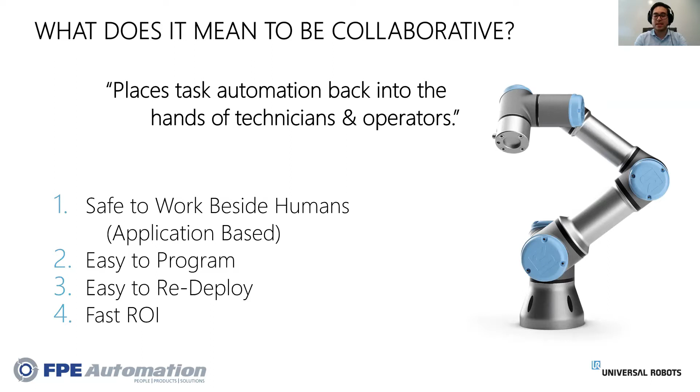Number 3, cobots are redeployable. Because they are safe and easy to program, the time it takes to reset for a different application is very manageable. And finally, number 4, a fast ROI. By the end of this presentation, it will be clear why cobots have the fastest payback at this scale of automation. In my section, I'll go over the advantages cobots have in keeping the overall costs down.

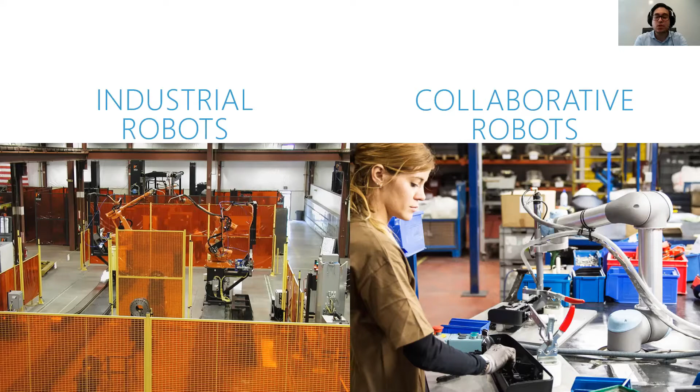So this is huge, and there's no people working in the cell at all. On the right, you see what cobots are achieving today: smaller footprint, which means higher efficiency, and using the cobot as a tool to take the repetitive tasks out of the manual process.

From a business standpoint, we have to look at costs, and that's where the difference can be less obvious. The initial cost of the industrial robot is similar to the cost of a cobot. The difference is what's below the surface. For an industrial robot, we have end-of-arm tooling, 3-phase power infrastructure, fencing and guarding, light curtains, safety scanners, software license, integration and programming, maintenance and repairs - the list can go on.

Now for the cobot, we have end-of-arm tooling and teaching, and that's the goal, to get rid of all that unnecessary stuff. So beyond keeping the costs down, there are many related challenges that a cobot can solve. In a tough labor market like in the US, manufacturers can struggle to find engineers with automation skills and experience, and that can add even more to the implementation challenge and cost of the industrial robot.

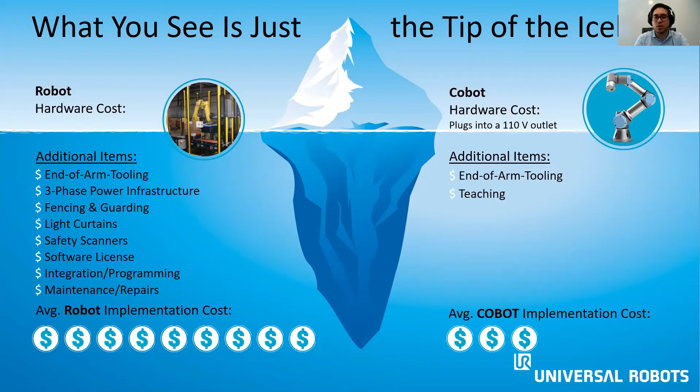So I want to go over some of the challenges to automating. Let's take a closer look here. In the world of manufacturing, everyone is facing increased competition and the need to improve margins. We know that. For smaller manufacturers, you may not have many processes automated, so you have high mix, low volume production. That might not be as cost effective for traditional automation, especially if you're not a robotics programmer.

You might have limited space as well, so the need to keep a small footprint is somewhat mandatory. For larger manufacturers, even if you're highly automated, you're still stuck with many repetitive manual processes where a large industrial cell just doesn't make sense. And that can lead to high employee turnover as well as quality and consistency issues to just keep those manual. Now, of course, at any size, you need to maintain a safe working environment for your employees. You might have workers' comp claims due to poor ergonomics.

And finally, we all know you need to do whatever you can to hire and retain employees while still staying competitive, and that's another place that universal robots can help. So with that in mind, I want to move into your business challenges. According to a 2018 survey of a diverse group of manufacturers, these are the main challenges facing companies today.

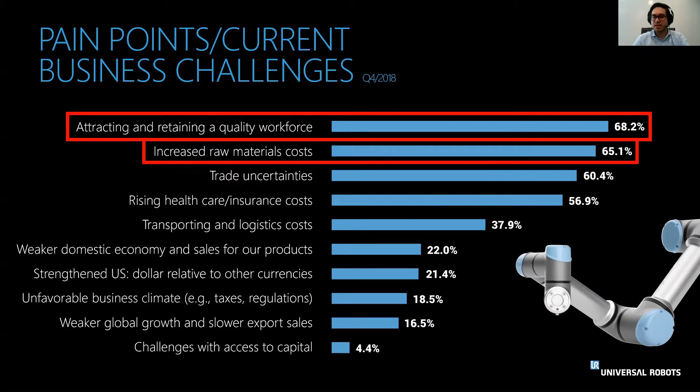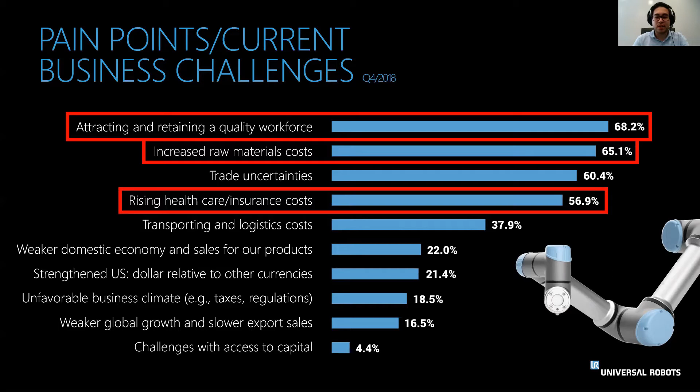When it comes to attracting and retaining a quality workforce, what if you could automate the dangerous tasks and improve your workers' lives? When raw material costs are ever increasing, what if you could immediately improve quality and reduce scrap? And with constant rising healthcare and insurance costs, what if you could lower your total labor cost or increase production without increasing labor? We'll keep these in mind.

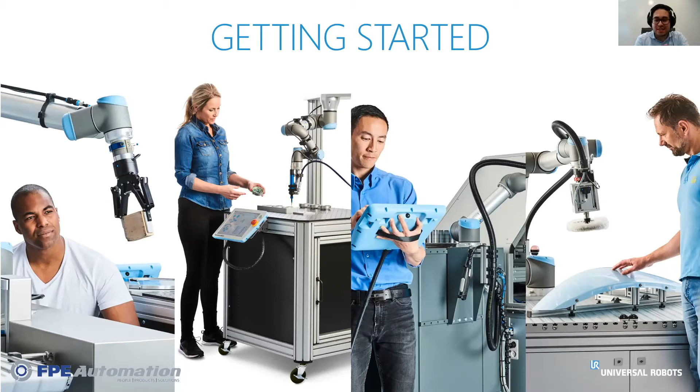So with a better idea of the motivations for deploying a cobot, let's get started on your application. A major benefit of working with UR is the vast experience in application examples. Literally, there's hundreds of videos of real-world cases online, where some of the latecomer competition might only be able to show you some videos from a trade show booth. So popularity actually does have its benefits, and using existing application examples is one of them for UR.

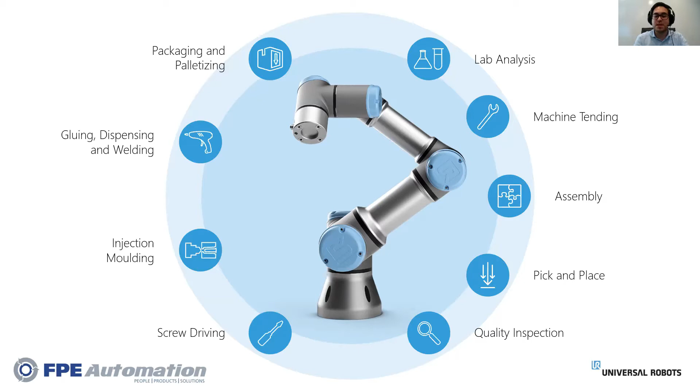This slide shows an overview of the most common applications for UR. I want you to think about your processes. Here's some questions: Where do you have these operations? If you could streamline one of these applications with a cobot, where would it have the biggest financial impact? Where could you find a good balance between the financial impact and simplicity that would guarantee you a quick win? Not only are these good questions to ask yourself, but it's even better to schedule a plant walkthrough with one of our experts so we at FPE can be an active partner in your automation growth.

So you might have heard of the 3 Ds before: dull, dirty, dangerous. These are a great rule of thumb when thinking about the right application. Dull refers to the repetitive tasks that require rote movement and no decision making whatsoever for someone to do it manually. There's so many benefits to automating a dull task.

Humans, they can lose focus if it's not engaging their mind, right? So this can lead to quality issues and an unmotivated worker. In a human-machine study conducted by MIT researchers at one BMW factory, it was shown that teams made of humans and robots collaborating efficiently can be as much as 85% more productive than teams made of either humans or robots alone.

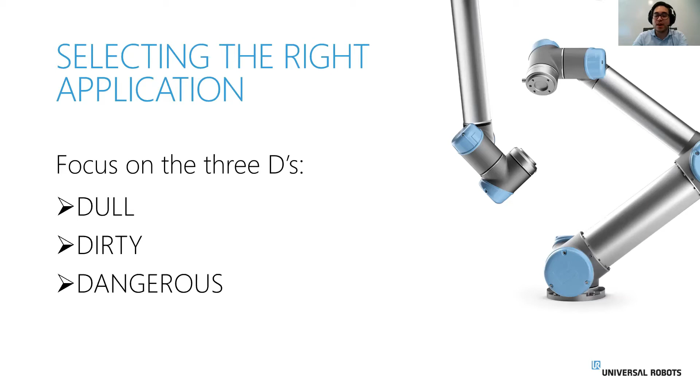Dirty refers to the tasks where humans don't want to work. There's coolant, fumes, oil. These can make a job difficult for a human, but a properly protected robot will never complain. Finally, dangerous - that refers to all the health risks posed toward humans. This can be as obvious as placing a part into a press, pinch points, or it can be as subtle as shoulder pain and arthritis from repeated motions over time. Not only is protecting your workers the right thing to do, it can be a huge cost savings in healthcare premiums.

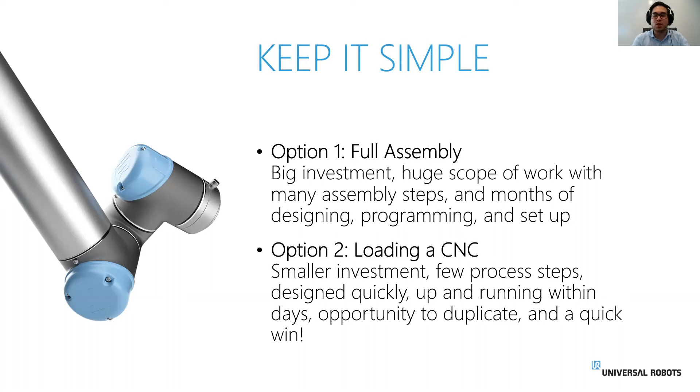Option number 2: loading a CNC machine. There's a smaller investment, few process steps, quickly designed, up and running within days, opportunity to duplicate, and a quick win. So if I'm planning my first cobot, I want the quick win. Everything my team learns in implementing the first one quickly will help on that next bigger project.

And there's no hard rule for which applications will be the simplest, but there are usually some good places to start: pick and place, machine tending, and gluing. You could add in palletizing and case packing, but it really just depends on your situation. You definitely want to refer to an application review by FPE. That's going to help a lot.

So another thing to keep in mind from before, the robots can work right next to humans. So even if you only automate a portion of the task instead of undertaking the entire project, the sooner the robot is up and running, the sooner it starts to pay itself back.

If you're planning on a partial automation, it can be tempting to want to deviate from your initial plan. You're starting to put things together, and it could just do that one more thing - that's not going to be too much work. We call this scope creep, and it's easy for the project to run away from you. But you don't want that first implementation phase to drag on endlessly. You want to maximize your ROI, and that takes a good amount of discipline.

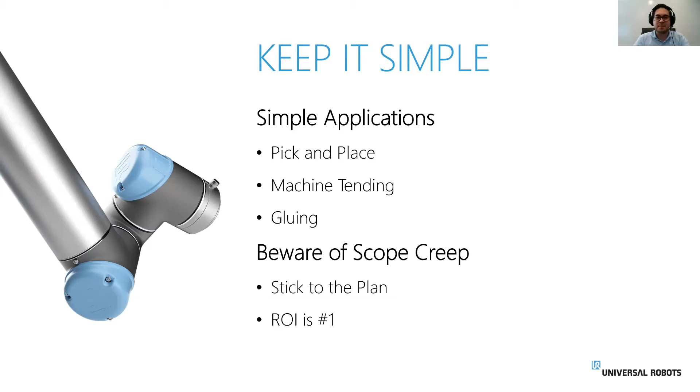We are located in St. Louis, Missouri, and a few of the topics I want to talk about today are, first, how can FPE Automation help you get off the ground running with your automation project? There are about 5 different key points I want to talk through today, and the first one is our UR Core training facilities. We have 2 UR Core certified Universal Robots training facilities, and I'll discuss them a little bit. We can also do proof of concepts in-house for your particular application.

If it's something you want to see proved out, selecting the correct third-party equipment - end effectors, slide kits, covers, sleeves that you may need for your robot - I'll get into that. Online resources are available to you for free, and completing the project, whether in-house or with help from one of our 12 certified systems integrator partners - we'll discuss how to decide which way to go on that end.

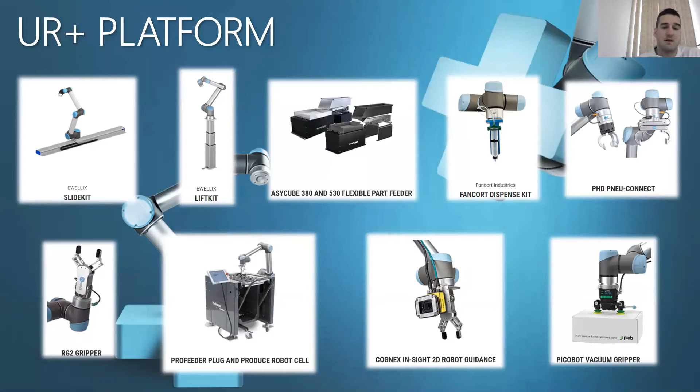Justin mentioned this earlier when talking about keeping it simple - the UR Plus platform. More or less, it's an ecosystem or an app store for Universal Robots. You can see here a number of different third-party equipment: slide kits, lift kits, feeders, dispensing systems, end effectors, and different things like that that help you get up and running as quick as possible.

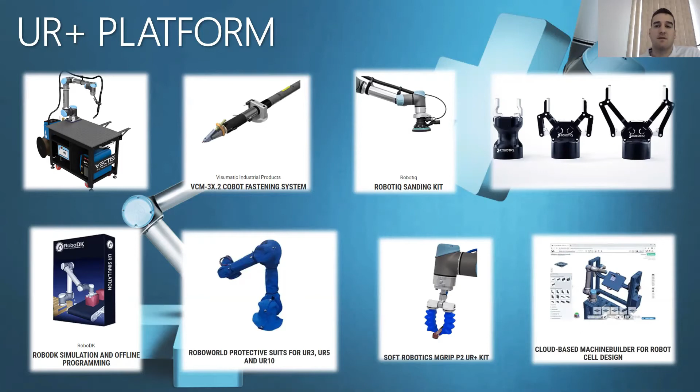So it's really a plug-and-play type of system to get the end user up and running as quick as possible. Everything can be operated through the teach pendant, and you can program everything without having to use any kind of other software - it's all there.

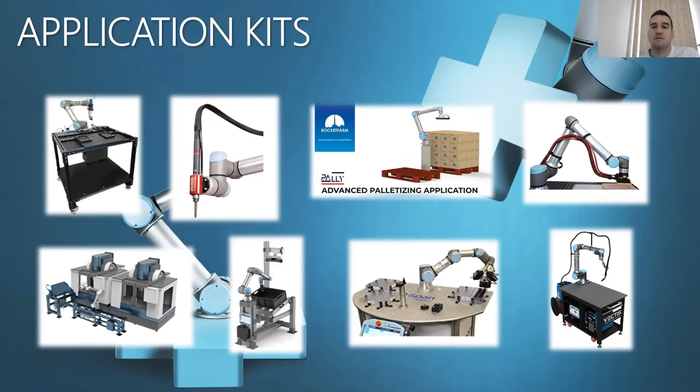So, e-learning - Universal Robots is the best in the industry at their e-learning online resources. They have an 87-minute course that will really get you up and running with Universal Robots, as far as how to hook up sensors, conveyors, how to get the robot to talk to each of these in your application. The basic is 87 minutes, and there's a more advanced course too. There's a few different modules on there that are very interesting and very well done.

Another company that does a really great job at e-learning is Robotiq. Robotiq has e-learning for all of their grippers, for their force co-pilot, for their finishing co-pilots, for their machine tending co-pilots. There's a number of different resources that you can look at online, and we can help you and send you the links and get you this information so you can start learning right away. And it is all free of charge.